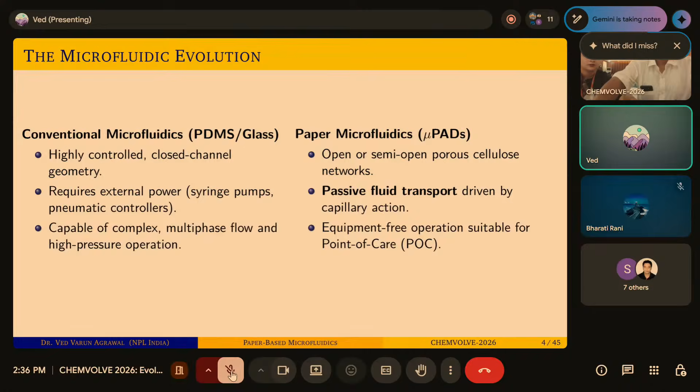Efficacy. So if you are aiming for devices for home, do such devices really qualify? No, they don't qualify. So what is an alternative? People are working on paper microfluidics, something which we all know, the dip test. This is also an example of a kind of paper microfluidic where you put a drop of blood, urine, or anything, and you get a quick test. Even swab samples you can put in this kind of thing.

So paper microfluidics is really coming up and replacing the conventional microfluidics. And what really goes into paper microfluidics is a paper, as the name suggests. But paper is just a symbol. It need not be paper. It can be a two-dimensional substrate which is flexible. It can be of cellulose or it can be of nylon. Anything which gives you the option of functionalization, holding the substrate and performing the test. And mostly these tests are colorimetric, meaning you will sense some change in color.

Okay. So, like I mentioned, on your left, you have conventional lithography-based microfluidic channels where we have used an ITO and then we had a PDMS block on those 3 lines. If you see, they were made using SU-8 using photolithography, and then again photolithography was used. So it was some 7 to 8 step process, and it was very critical.

On your right, you see something, and both of the works are from our lab. On your right, what you see is just on a paper. We used a 2D plotter, we had our own 2D plotter, and we just made circles which confine the flow of liquid. These are like hydrophobic boundaries, so liquid will remain inside. These hydrophobic boundaries you can make using wax or even with PDMS or anything which can stop the water flow.

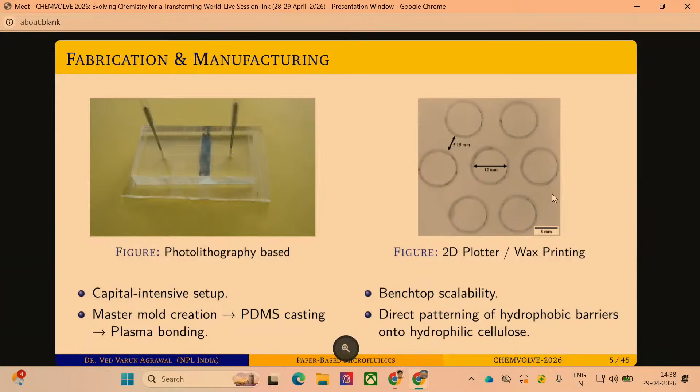So a quick comparison: the conventional PDMS needs a driving pump. You have to have a pump because those channels are very fine, so you need to push that liquid inside. But in paper microfluidics, the pores behind it, like in your trees, the water inside trees is again an example of capillary action. Cellulose is known for it, and with all the pores it has, it can suck the liquid to a certain level.

Liquid can go from the ground to a 22 feet high tree. So why not in a paper? That's something very easy. You don't need an active pump for that matter. If you talk about fabrication, you don't need a clean room and photolithography.

Even college students, or even school students who are really good with open hardware, can use a 2D plotter. And even with the hand, you can write those channels. It may be very cumbersome, but if you have a pen in your hand which has a special ink, like hydrophobic ink, it can give you a paper-based microfluidic channel.

Reagent, so you need sometimes cold chain, but here we apply the reagents. And the functionalization is a key, so dry reagents can be used. Disposable, I would say both are more or less same, but because on your left you have a liquid, a little precaution has to be maintained. On right, since it is already in a dried form, yes, both of them stand equally.

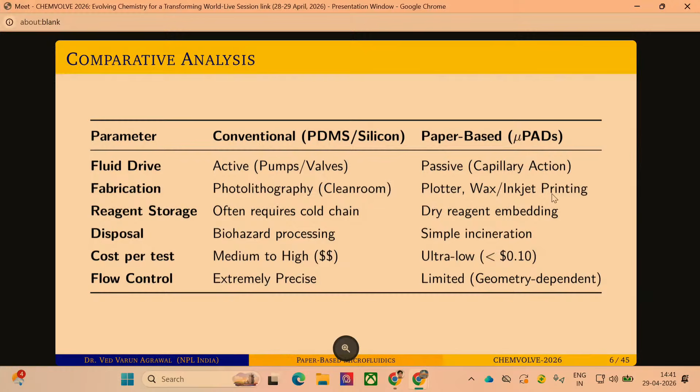And flow control, yes, on this, the conventional PDMS is always the winner. This is like you are at the mercy of a type of paper and the fibers and the pores inside it. So liquid goes on its own. You cannot dictate where the liquid has to go. For dictation, yes, you have those boundaries, but still it's a little cumbersome and messy. So if you ignore this last parameter, flow control, on all the other aspects, the paper-based μPADs get an edge over conventional lithography.

So the core principle of this is that if you place a drop of water, it will try to spread in all the directions. But if you can create a wall, just like a road or footpath, where you do not allow the liquid to go in all the directions, just like hydrophobic walls, the liquid will be forced to flow or will be directed in certain paths, which we assume will be a channel. Speed is not really in your hands. The liquid gets its own speed depending on the porosity of the paper.

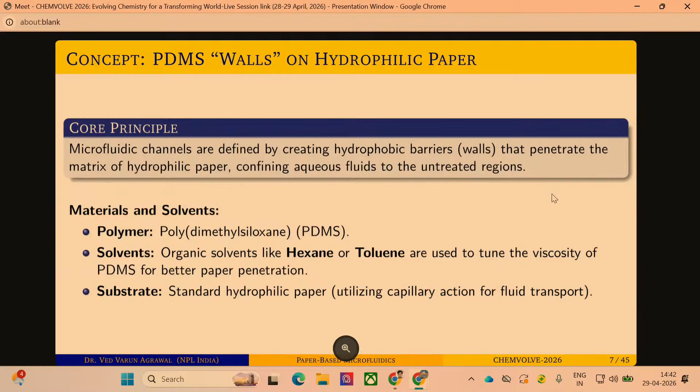So for these walls, you need something which is hydrophobic, and we thought of PDMS. This work was first done by Whitesides and they used PDMS, so we are also using PDMS. But PDMS is very thick. So you need to dilute it, because if you want to write it, you should have a carrier organic substance, something like hexane or toluene, which reduces the viscosity. So it has to be mixed in a certain ratio. Again, one has to figure out what ratio is appropriate for them. So this is a subject of study, and then you create hydrophobic channels.

So for that, finally you need a drawing of the pattern you want to draw, and you need a desktop plotter. Now, since we were already cost cutting and this work started during COVID, we did not have time to go and purchase expensive equipment, so we developed our own 2D printer. This is not something very novel. In fact, college or engineering students often develop their own printers. We had a Prusa RepRap 3D printer at our lab, which we had assembled. So we just took out its Z-axis, and instead of a 3D printer, we were using it as a 2D printer.

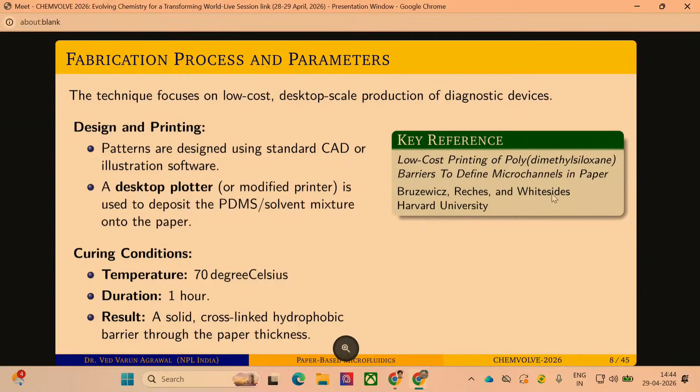In the very first project, published by Whitesides, they were curing it at 70 degrees for 1 hour, which we thought, for such a small quantity of liquid, is too much. And though the temperature was appropriate, 70 degrees is still on the higher side for many biological reagents. So can we work on this? That was an idea. So these were the initial ideas for that system.

Now we settled on working on paper microfluidics. It doesn't require those expensive prototypes, so it can be done quickly. You can print like conventional paper; you can get 1,000 prints from your printer. Similarly, you can print as many patterns. The technology was fast, and it uses chemicals which are stable because they have to be on the surface, mostly based on the functionalization of materials, not liquid materials. So paper microfluidics really has an edge over conventional microfluidics, if anybody is thinking to start work on microfluidics.

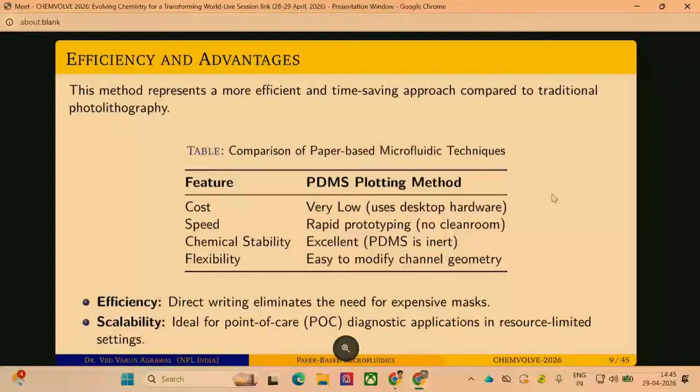So the takeaway: we talked about the comparison between conventional microfluidics and paper microfluidics. Being in India, where we are still setting up many things, cost is an issue and reachability is an issue. It's not that we have connected roads everywhere, and hospitals, everybody wants their own system. So these are the advantages we had, and for the long term, if you really look at Atmanirbhar Bharat, yes, we should indeed have our own point of care systems, which are microfluidic-based systems. Okay.

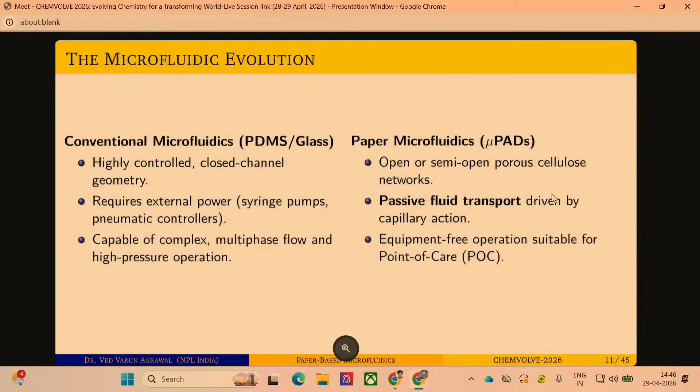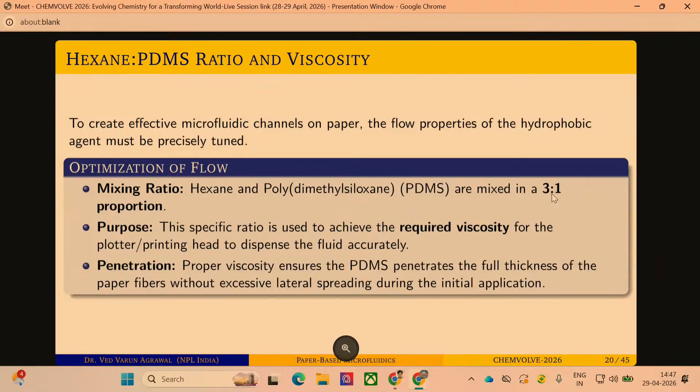So this is our schematic. We mixed hexane to PDMS at the ratio of 3:1, and the idea was to have the ratio of hexane higher because we wanted to reduce viscosity to a large scale, because otherwise it will not flow in that tubing, which later on we had changed, but this is an initial work. So to ensure the proper viscosity, this is an optimized value. It becomes too dilute. So you can see that it is not really stable.

If you see on your right, we have these three measures, which show how with time these patterns, even after curing, spread. So if you see the very first image where we have made a star, it was just after 1 hour, and you already see that all the lines of the star are not equal, meaning just because we took a little time in writing them, by the time we reached the other end, the ink had already started to spread, even when we tried curing it. So you can see that the edges of the same star are not uniform.

And if you leave it just like that and observe, after 3 hours, there is a spread, because the curing is not uniform. Paper has its own thickness, and there are small pores which will never dry up. So the ink was spreading, and after 20 days, that is what we assume is the maximum, we have seen that the star had become a really bulgy star. So the ink was spreading with time.

So how do we get rid of this problem? This problem essentially came because, had it been pure PDMS, you would not have got this problem. This problem occurred because you are diluting it with an organic agent. But then there is a downfall. If you remove the hexane or toluene from the system, it will not behave like an ink.

So this is a little study where we have done a comparison of different papers. So we thought, let's change the paper itself, because there are papers which, for example, Whatman is a cellulose-based system and Biodyne C is a nylon-based system. So we thought, can we solve this problem by changing the paper in the first place?

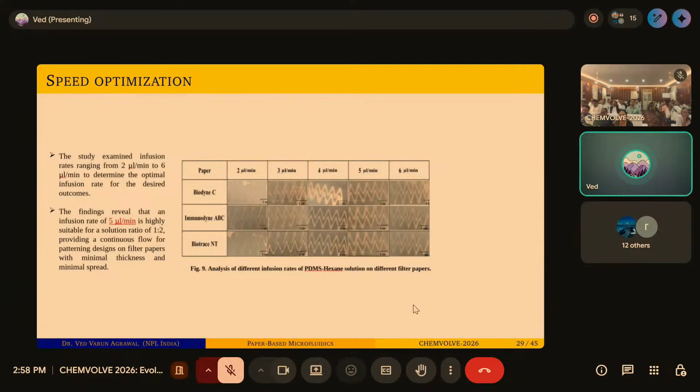And then we tested how good these channels are in terms of restricting the liquid. So as you can see, after making 6 patterns, we have just placed a color drop. There is just a color drop and it is indeed flowing only in that channel. So this further confirmed that what we made was...

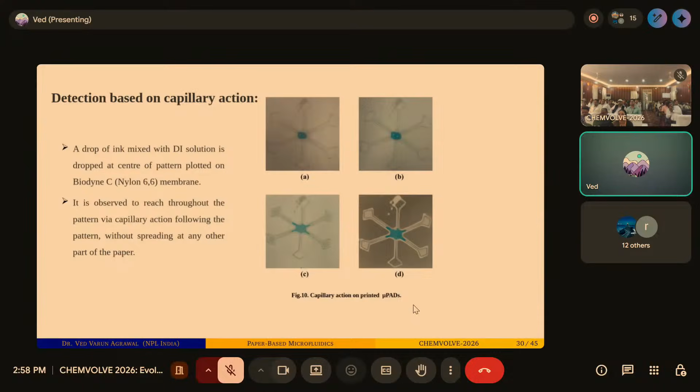This was just a study, not with any intention, but to see whether the colors will appear as they are on a substrate or not.

So we had two color solutions of different medicines like aspirin, ciprofloxacin, paracetamol, and we at one point thought that it can be made in such large structures. And all of them give different colors just by addition. So we placed these different materials on the two different sides, and the particular solution was indeed giving different colors. And those colors were interestingly visible with the naked eye.

So that was good. So we compared the color which we got in the textbook and UV spectroscopy and also with the image. And indeed it was comparable, but on the paper you definitely always get lesser color feeling. So then we thought, can we take it to the next level? Can we work on something?

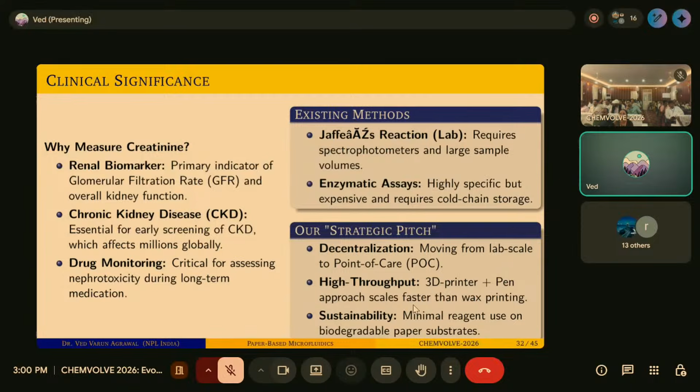So what we did was creatinine. Now creatinine is kind of a gold standard if you really want to see whether your kidneys are working, and it is the gold standard for finding colors. So we started with creatinine, and the normal test of creatinine is using the Jaffe reaction, which usually requires the spectrophotometer and large sample volumes. We thought that it can be used just as a model system. And so with this idea, we started.

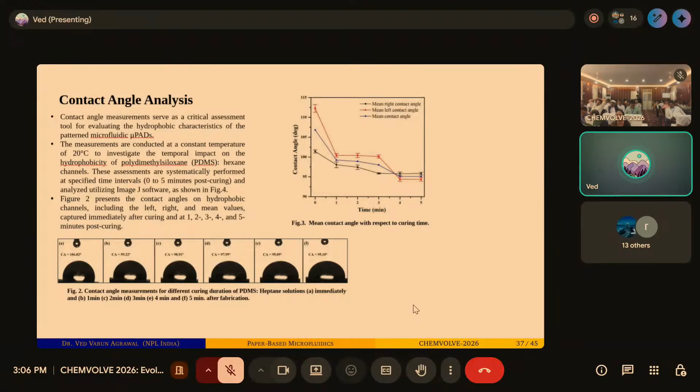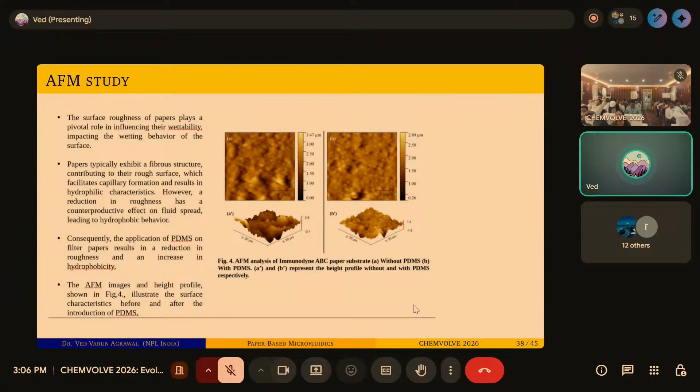Again, these are the AFM studies, where we have used Immunodyne paper with and without PDMS. So what are the changes in roughness? And indeed, in this case also, the Immunodyne ABC is the superior paper to work on.

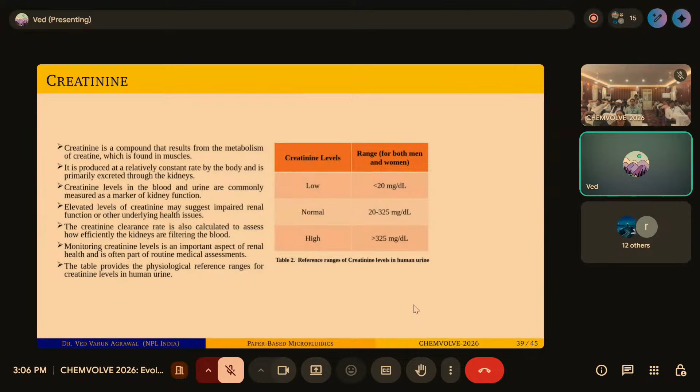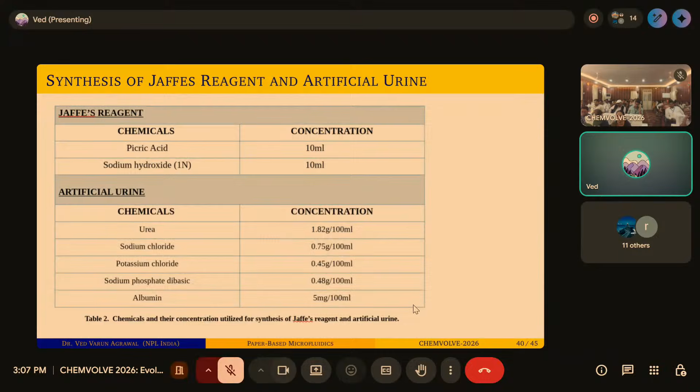These are the typical concentrations of creatinine the human system should have. Here is how to prepare Jaffe's reagent, and we have used an artificial urine system to do all these experiments. In our lab we make artificial blood, artificial urine, artificial tear. Being a metrology lab, this is our bread and butter. So the artificial urine was created, and Jaffe's reagent was done.

Now on your left, those circles which we have made: at the center we have created a reference, and we have changed the concentration around it in different circles, and one of them would be the real sample, and the rest would be for comparison. We have made a small Android app using this, on which at the center you have the sample from a patient, and outside you have known colors of different concentrations, and we compare to which color it is closest.

For example, in this case, it will be closest to 0.5 mg. So that is how we give a concentration. We cannot give very defined concentrations, but we can give something which we can read through the eyes and compare. We have 6 reference concentrations, and if you see through software, all these 6 have a different intensity of red and orange, which we measured using ImageJ software. They were giving quite intense color up to full saturation, as you can see from the linear plot, and they're also in the linear range. Though there is one outlier, with repeated measurements those things were optimized.

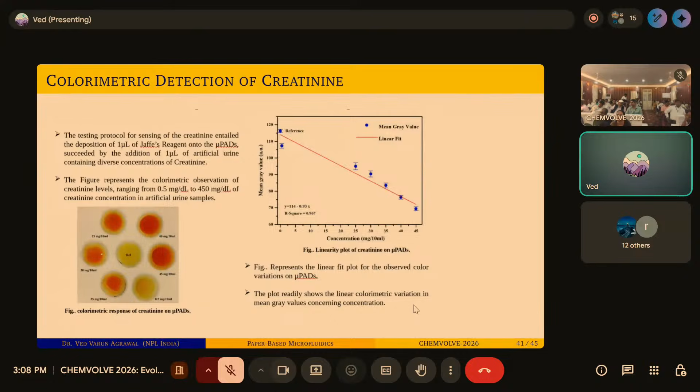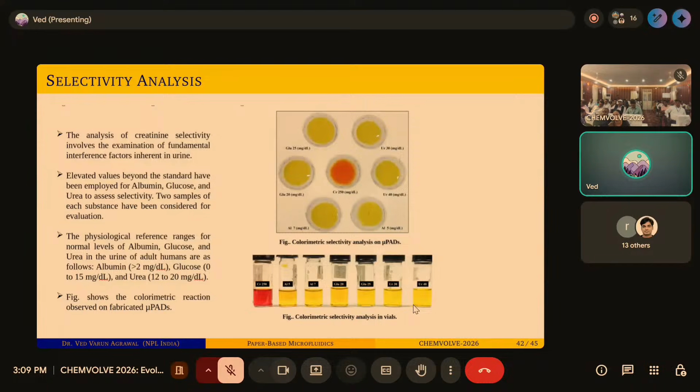So we have made a colorimetric sensor, a crude sensor for creatinine for home use, and these are some selectivity studies for other interferents which we can have in our urine along with creatinine, for example, albumin, glucose, urea. All those things were studied, and we found that the Jaffe mechanism, not something we have done, is very selective. But is this selectivity transferred onto the paper system, is our ink or anything on the paper contributing to that? No, it is not contributing. So the Jaffe reaction was successfully occurring on a 2D substrate, that is our nylon paper, as well. This is just to clarify that.

So this is what I was trying to tell, that 2D paper substrates are no less than conventional microfluidic systems, and they can be used for disease detection. As it is easier to fabricate, even a college student or a 12th class student or a hobbyist can create such patterns at home using open hardware systems and create their own microfluidic devices, or something else as well. You need not be limited by expensive equipment or lithography steps.

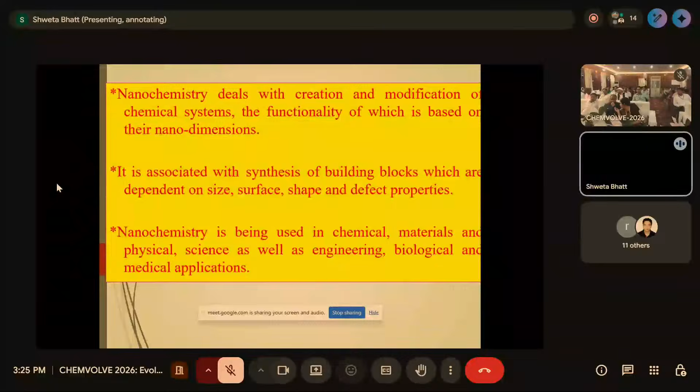We can also make electronic components which are small in size, and we have to modify them for that purpose. There are a large number of methods we use for preparation of the particles, as we well know: physical method, chemical method, and biological method.

As for the physical method, there is the mechanical method, sputtering, electric arc deposition, ion beam technique, molecular beam epitaxy. There are a large number of physical methods, but in the case of the physical method, they involve tedious work and multi-step reactions.

We have also used to synthesize the nano-size range of particles by using the chemical method. There are several methods like co-precipitation method, sol-gel method, microemulsion, hydrothermal synthesis, sonochemical synthesis, microwave synthesis. These are the large number of chemical methods we are using nowadays to synthesize nanomaterials. Out of them, the sol-gel method and combustion synthesis method are the most appropriate methods to synthesize the metal nano-size material at the lab scale. But on a large scale, it is very difficult to synthesize the nano-size material.

We have also used the biological method, like using plant extracts as a reagent in the synthesis of the material. We have also used enzymes. We have also used agricultural waste like bagasse and other types of waste for the synthesis of nanomaterial. But in all cases, we have seen that these methods are multi-step methods, and they also need lots of tedious work in the lab, and it is too difficult to use these methods for mass production.

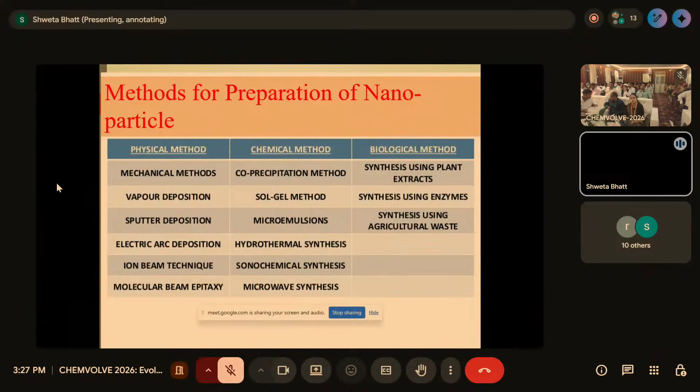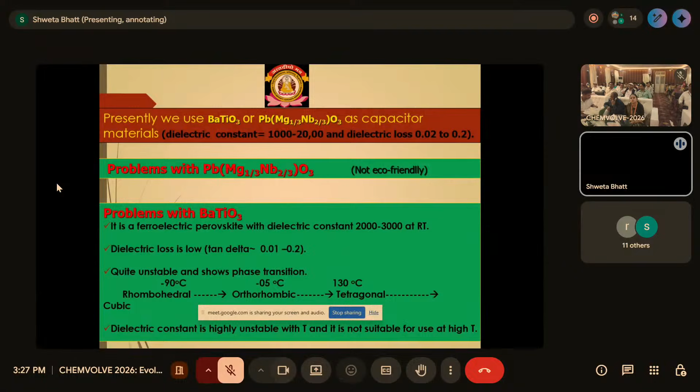So we are discussing about capacitor material or dielectric material. Nowadays, we are using capacitors having barium titanate and lead magnesium niobate oxide as dielectric materials. In the case of barium titanate, the problem with these two materials is that they are already commercialized,

but the problem is that the first one is not eco-friendly, because the lead-containing material is not good for the environment as well as human beings. One of the materials is barium titanate. In the case of barium titanate, we are using it nowadays as a commercialized material, but the main problem is that this material has a low dielectric constant. The dielectric constant is realized between 2000 to 3000 at room temperature.

But also the dielectric loss is low. One more disadvantage of that material is that it has a large number of phase transitions, meaning it changes structure. It means it is highly unstable with temperature, not suitable, because if we want to use this material in a missile system and aerospace system, it is not a better material. So for this purpose, we have to discover a new material which has a high dielectric constant with low dielectric loss.

In search of that material, we require a material which may be an ideal capacitor. For that purpose, if we need to store high energy, we need a very high dielectric constant. Presently, barium titanate has a 2 to 3,000 value. So if we search for a material which has a very high dielectric constant, more than 10,000, it will be much better for electronic devices.

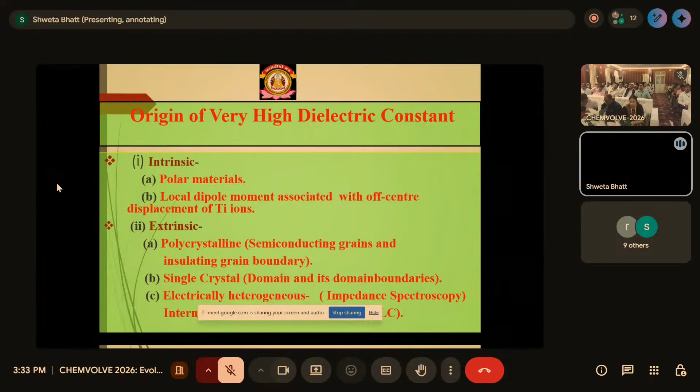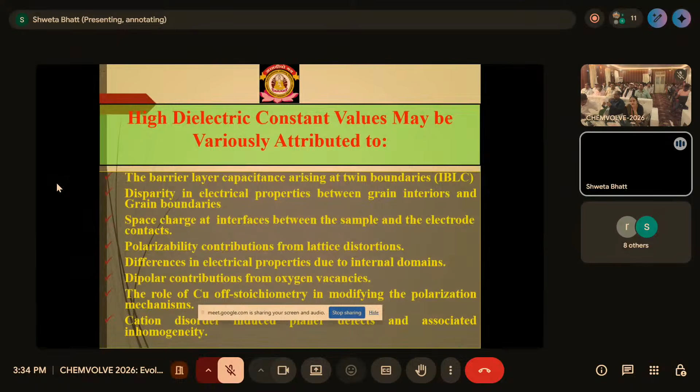So for high dielectric material, there are a large number of reasons. One of the most important reasons is IBLC - internal barrier layer capacitance between the semi-conducting and insulating grain boundary, because in CCTO they have different types of grains - some large grains, some small grains, and there may be an interface between them. The grain boundary is an insulating boundary, and it can cause the high dielectric constant of that material. But we need a high dielectric constant for that purpose, so that provides the good material for that one.

As we know, doping with external metal ions and other things is used to make a material have a high dielectric constant or low loss. One thing that's clear here is that for a commercial capacitor material or dielectric for capacitor material, we need a high dielectric constant material, as well as low dielectric loss.

As we know, CCTO may be commercialized, but there is one drawback - CCTO has a high dielectric loss. For that purpose, we have to use different types of dielectric, different types of metal. We have to dope inside it, and we have to replace with cationic anionic substitutions.

Along with the method used to synthesize this material, the synthesis and processing parameters also affect the dielectric constant and dielectric loss of that material. In the case of different processing parameters, when we synthesize the material, it has different types of processing like sintering temperature, calcination temperature, along with different types of atmosphere.

We can change the properties of these materials by doping. Secondly, we have to use different synthetic methods, along with different processing parameters for that material. In the case of synthesizing the material, dry method, wet method, and semi-wet method I have reported already.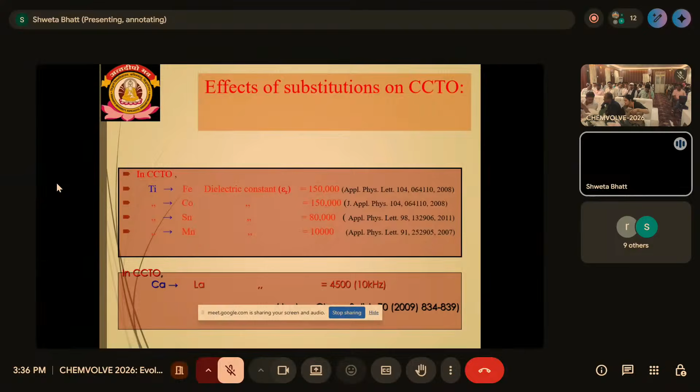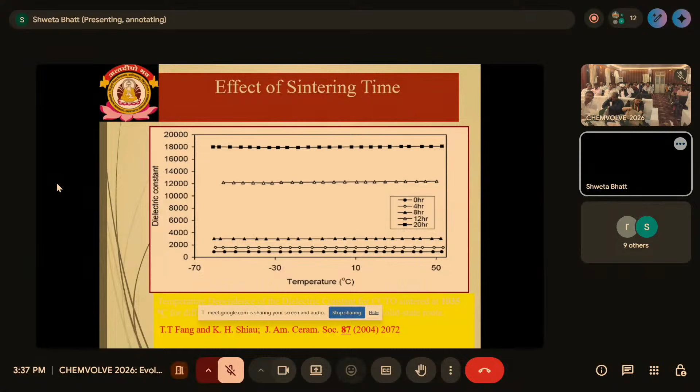Along with processing parameters, whenever we fluctuate the sintering time, the dielectric constant also changes. If we use a longer duration of sintering of the material, the dielectric constant may be high, up to 18,000. This means the sintering parameter also affects the dielectric property of these materials.

So the main objective of this research is that first we have synthesized the material by different methods like dry method, wet method, and semi-wet method.

In the case of this synthesis material, the different type of solid state reaction needs a large number of metal oxides to be synthesized, and it will be synthesized at a very high temperature, more than 1000 degrees or more than 1200 degrees, and it also needs a long duration of time for the synthesis.

Second, TiO2 is the main component. Titanium ion is the main component of that material, meaning it needs a titanium reagent in the synthesis of this material. For that purpose, we are using solid TiO2.

But if we want to use the co-precipitation method and wet chemistry method, such methods need titanium oxychloride and titanium isopropoxide, which are very high in cost. So that is the problem then.

The other one is the semi-wet method. In the case of semi-wet, whenever we use titanium oxide in solid state form, it also needs sintering as well as calcination, because whenever we use glycine, urea and other types...

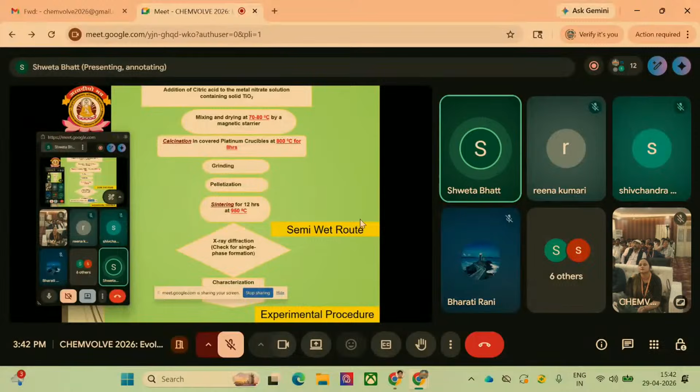So we have discussed about that last point. We have used here a method which is a non-aqueous method, also known as the semi-wet route. For this purpose, we use TiO2 as a solid state containant, and also we have used non-aqueous 2-methoxyethanol for this synthesis.

So these are the comparisons of the different synthetic routes. We have discussed about the automatic flame synthesis, the chemical route, and the conventional solid state route.

In the case of the automatic synthesis route, we have clearly seen that whenever we synthesize this CCTO material in the lab, it will mostly take 30 to 50 minutes to prepare the precursor powder.

In the case of the chemical route, we need many multi-step processes like preparation of metal ions, citric acid, using the glycine method, precalcination and others. It will take more than 30 to 42 hours. But in the case of the conventional solid state method, it can take more than 48 hours.

Using this automatic flame synthesis method, or non-aqueous synthesis method, it will take only 30 to 50 minutes to prepare the precursor powder for this synthesis. So that means it is a better method to prepare the material using the automatic flame system.

One of the main advantages of this material is that it can be used for mass production level, meaning it can be used for industrial purposes, for use in different types of capacitor materials.

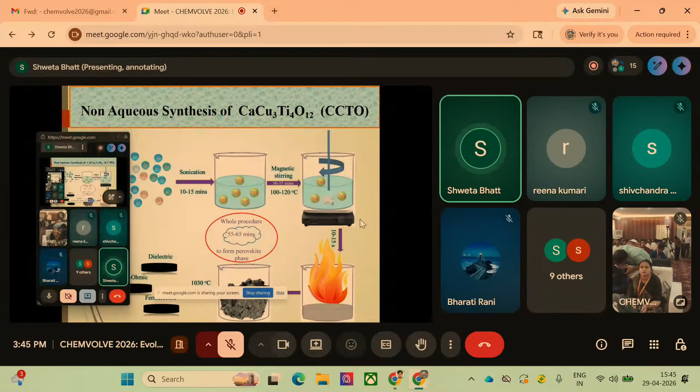And as we can see, the precursor powder will be formed in 55 to 65 minutes. It means whenever we use the conventional electroceramic method in the ceramic electronic industry, it takes more than 2 and 3 days. But this method provides a very short duration, so we are saving energy and time. We are saving both, and it also supports the SDGs, sustainable development goals, through low use of energy as well as the duration.

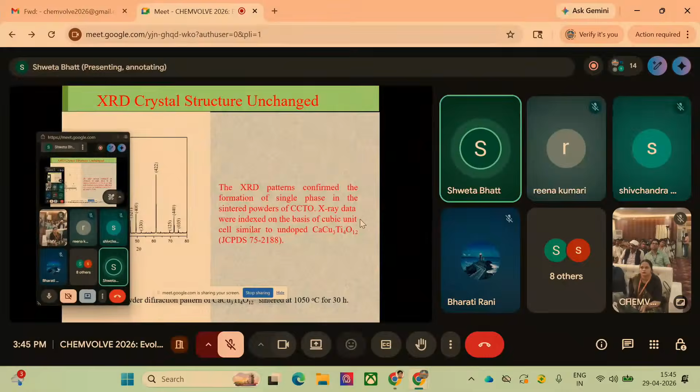So this is the XRD crystal structure of that one. It is a CCTO phase. It has a cubic unit cell structure, we have compared it, and it is a single phase material synthesized by the non-aqueous synthesis. It provides the simple cubic crystal structure by XRD, and it is a great method for the synthesis. Here we have also determined the morphology and confirmed whether the material is pure or not.

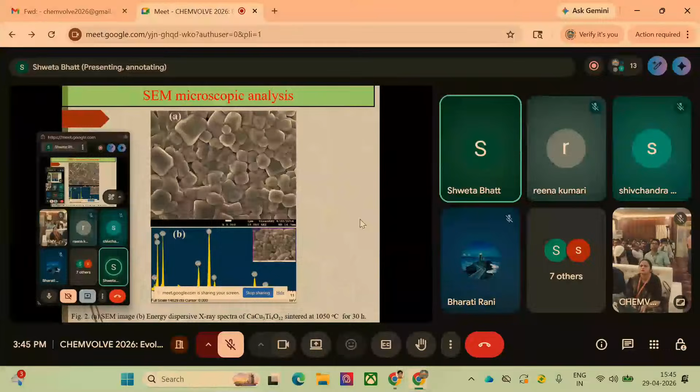For that purpose, we have used scanning electron microscopy, using a pellet to show the morphology. In the case of the pellet, we have seen that there are two types of grains in the morphology. Some are very large in size and some are very small. As we have discussed already, the morphology of CCTO is bimodal in nature. Bimodal means two types of grain, big grains and small grains, and there is a grain boundary here. So for the grains and grain boundary, we have discussed the IBLC. IBLC means the internal barrier layer capacitor. In the internal barrier layer capacitor, the material shows the high dielectric constant due to the grain boundary, which is insulating in nature.

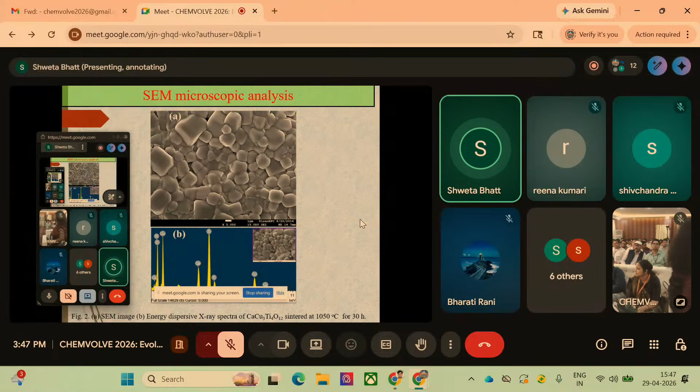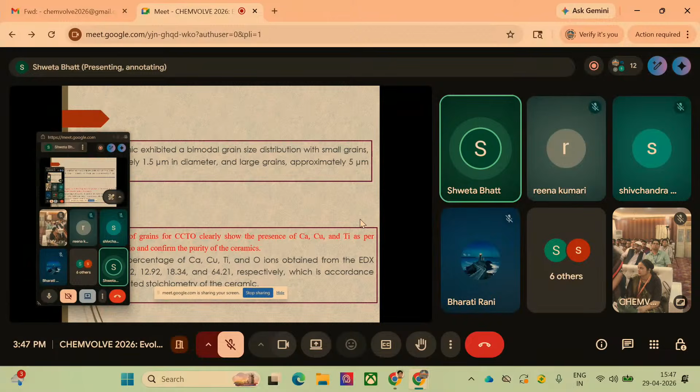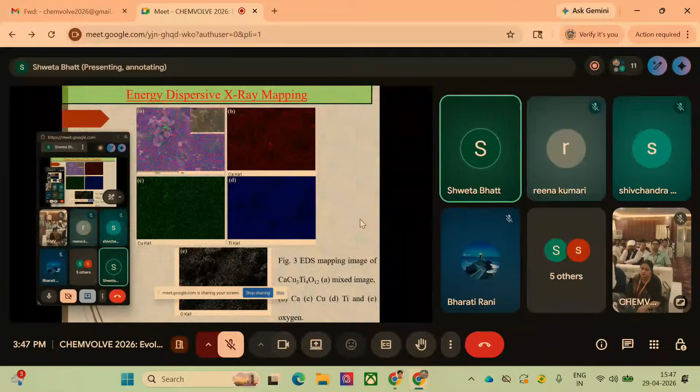As well, with EDX we have seen that the material contains calcium, copper, titanium, and oxygen, which shows that the material synthesized by the non-aqueous synthesis is pure, as given by the EDX analysis. So the morphology is bimodal in nature, and the purity of this ceramic is confirmed because calcium, copper, titanium, and oxygen are present in the stoichiometric ratio. We have also used energy dispersive X-ray mapping and seen that all the elements, calcium, copper, titanium, and oxygen, are present uniformly. So this method forms a uniform composition of the material, as clearly shown by the EDS mapping.

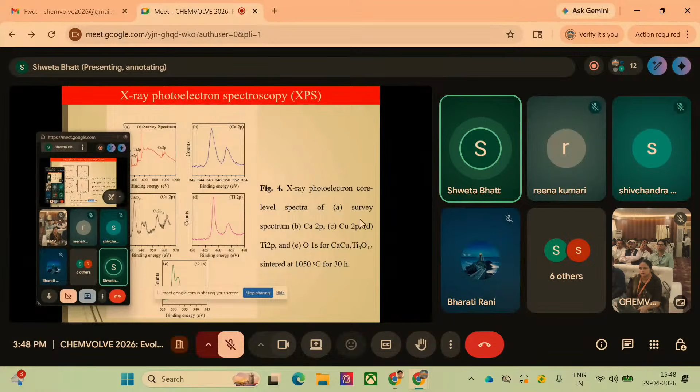Here we have also shown the X-ray photoelectron spectroscopy, XPS. In XPS, we have seen that calcium, copper, titanium, and oxygen are present. For calcium, two peaks are shown at binding energies of 348 and about 350, so calcium is present in the 2+ state, copper is in the 2+ state, and titanium is present in the 4+ state.

And this is the graph of the dielectric constant and dielectric loss versus frequency. Whenever we increase the temperature, the dielectric constant increases with the increase in temperature, and there is also some relaxation shown by the dielectric loss. We have studied this at a few selected temperatures.

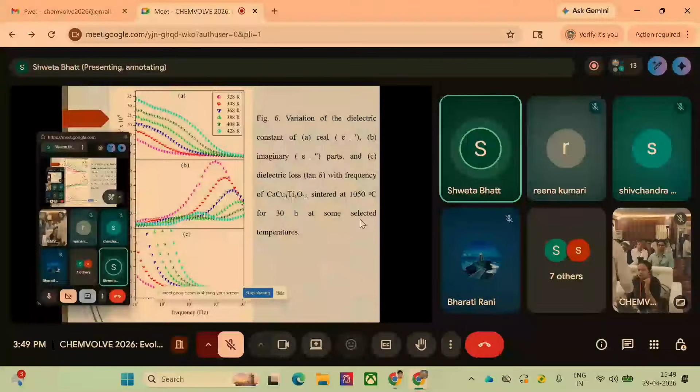It means the dielectric constant and dielectric loss depend upon the frequency, such as 1 kilohertz, 10 kilohertz, and 100 kilohertz, over the temperature range. In the lower frequency range, whatever the temperature, the conductivity is independent of the frequency.

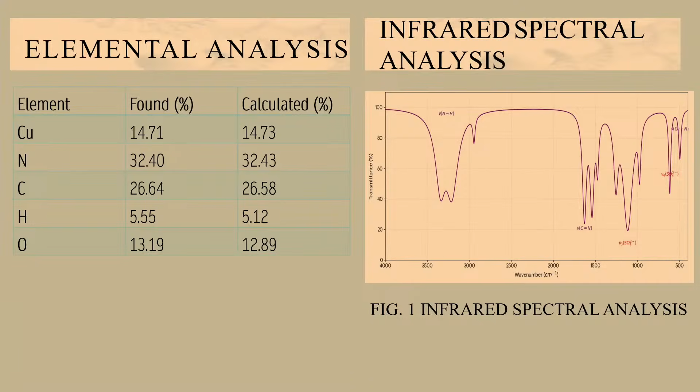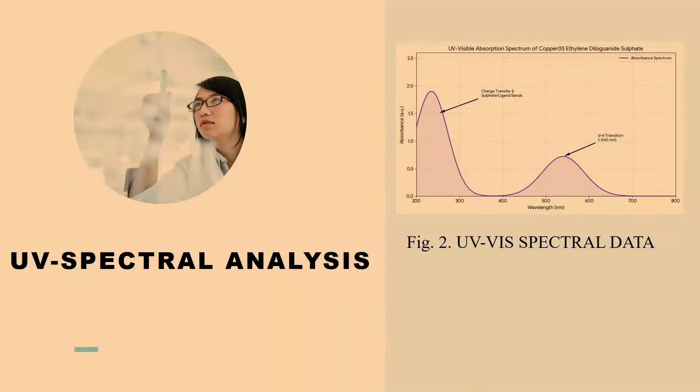Then the synthesis of the metal complex, that is copper ethylene dibiguanide sulfate. This is the elemental analysis and the IR spectral data: the peak around 3400 shows the NH stretch, while the peak around 1500 shows the CN stretch. The peak around 1100 shows the sulfate stretch, and the peak below 500 shows the copper-nitrogen stretch, which corresponds to the metal complex. This is the UV spectral data. The broad peak below 300 shows the charge transfer spectra, while the peak around 500 to 600 shows the d-d transition. This is the interpretation of the IR spectrum and UV spectrum.

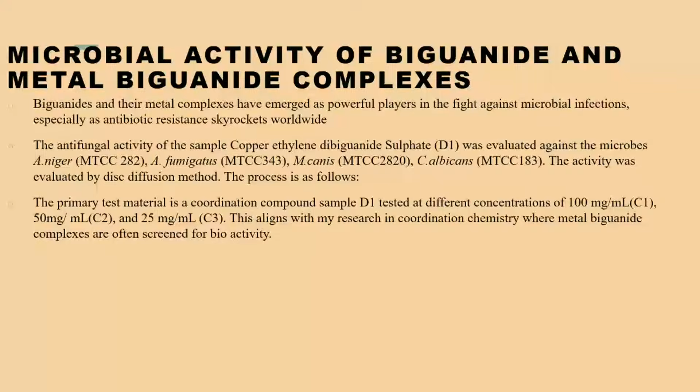Now the microbial activity of the biguanide and metal biguanide complex. The synthesized complex is tested for A. niger, Aspergillus fumigatus, Microsporum canis, and Candida albicans. Under 3 different concentrations, I have studied the zone of inhibition. This is the experimental method that I have used, that is the disc diffusion method.

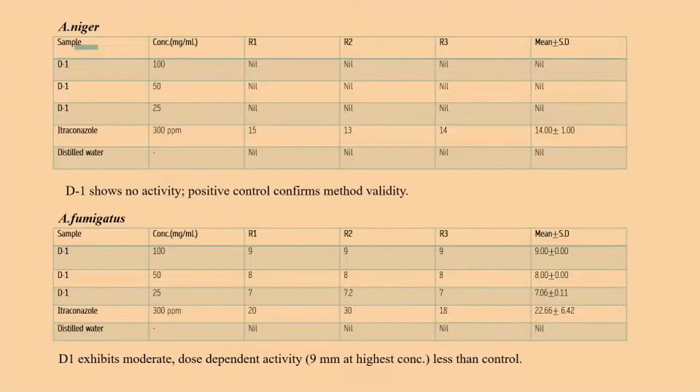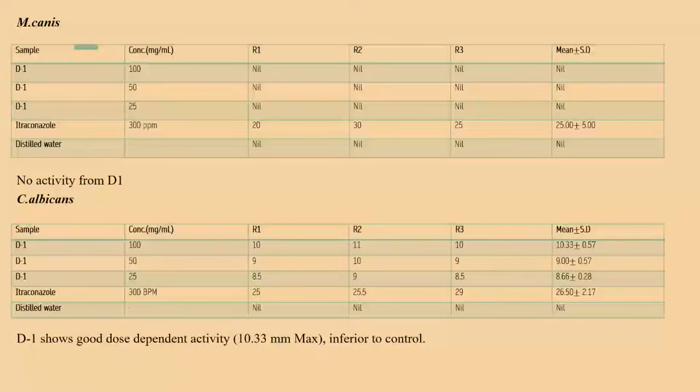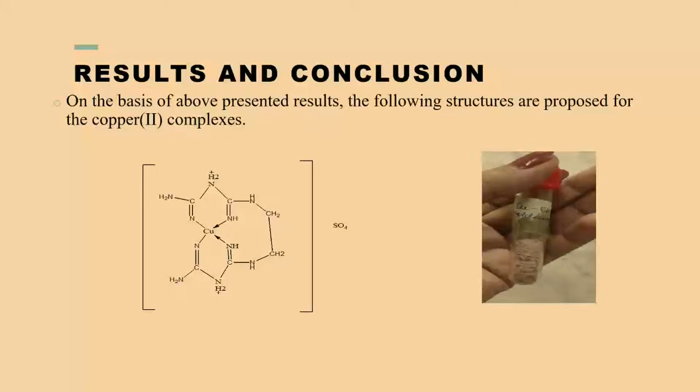So I can conclude that this is the structure for the synthesized complex, and the real photograph of the metal biguanide complex. In the future, I am planning on broadening the biological tests for this synthesized compound. Thank you.

I have a question. Yes, ma'am. The concentration which you used for antifungal activity? Yes, ma'am. It was the same for all the fungi. Most effective was 100 mg per ml concentration. At that highest concentration, the zone of inhibition was 10. Yes, ma'am. So it shows the maximum inhibition; at that concentration my synthesized compound shows the maximum zone of inhibition. Okay, thank you.